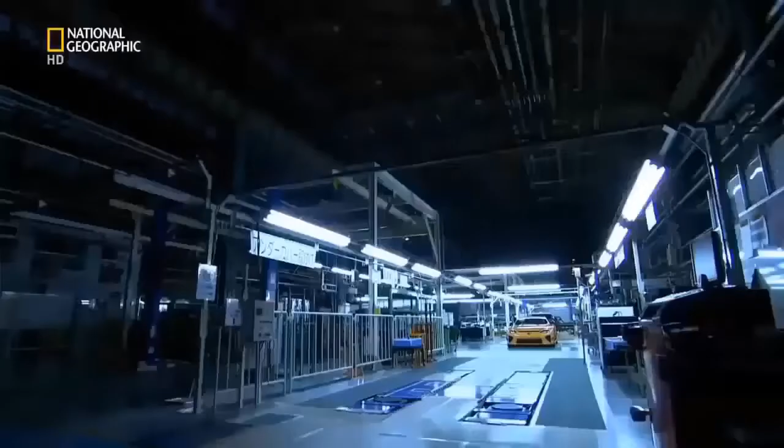Inside this top-secret megafactory, a car like no other is taking shape. Craftsmen hand-build what they consider an automotive work of art. Money is no object. This machine must redefine a billion-dollar brand. Failure, not an option.

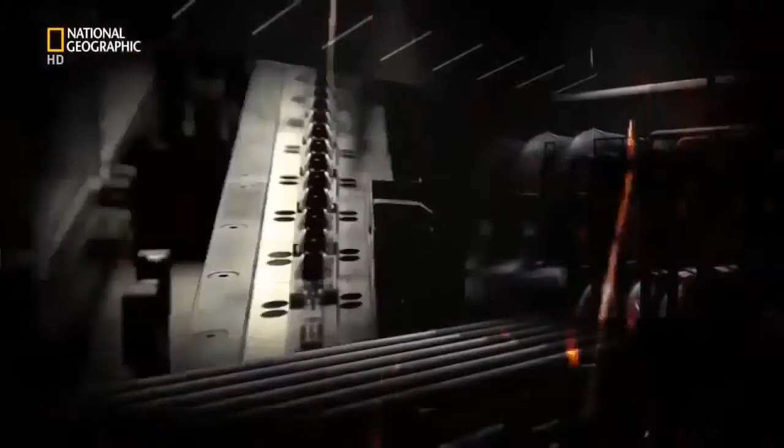Japanese marque Lexus sells itself on luxury, marketing its cars as elegant, quiet, high-tech, and efficient. Now, a different kind of car wears the Lexus badge, the LFA. Aggressive, loud, agile. Highest revving V10 engine in a production car. 325 kilometers per hour. A car like nothing Lexus has ever produced before.

Lexus is just over 20 years old. The world's largest car maker, Toyota, created the brand to compete with other high-flying luxury marques, Mercedes-Benz, BMW, and Jaguar. It's worked. Lexus is now one of the biggest-selling high-end marques in the United States. But now, Lexus is out to inject more excitement into their brand.

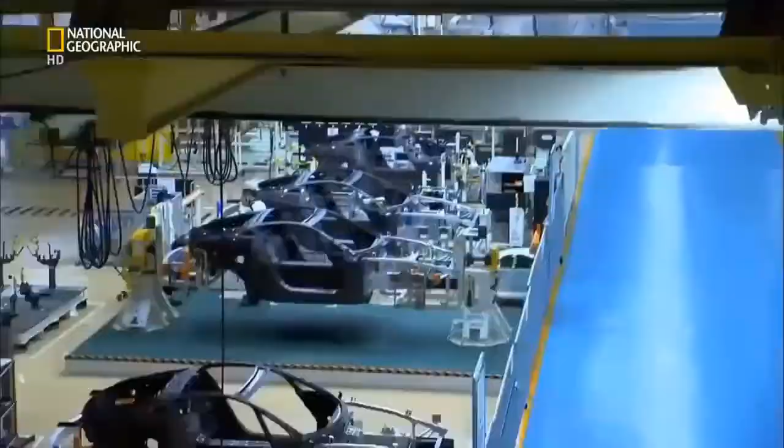I wanted to make a new sports car, one that could stand against the long-established European so-called supercars, Porsche, Ferrari, and Lamborghini, to show that we Japanese could make something like that. It's a risk. The company haven't made anything like this before. Their reputation depends on its success.

Chief Engineer Tanahashi is stepping into the unknown. He must build a car, a team, and a factory from scratch. Basically, we proceeded at my discretion. And where there weren't any rails, I laid them down.

Finding a factory in Japan isn't hard when you're part of the country's largest company. Toyota is so big, they even have their own city, Toyota City. Of the company's 15 Japanese factories, 10 are found in the city or close by. Among them, the Motomachi assembly plant. The company transformed two unassuming blocks of this megafactory to create the LFA. They then scoured Toyota's 50,000 Japanese workforce to handpick just 175.

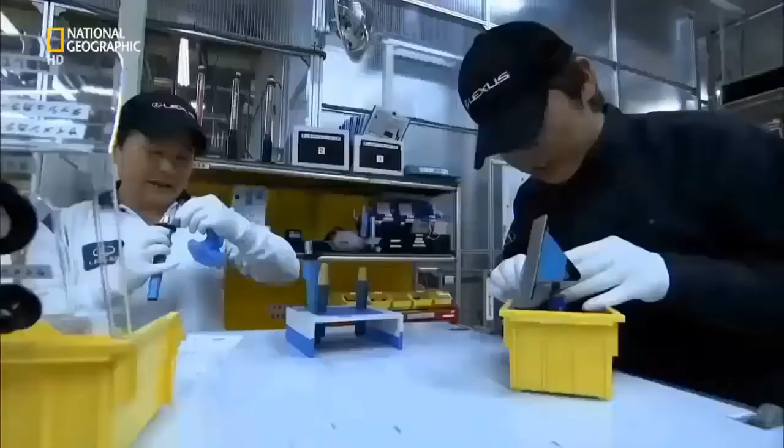All the associates here at the LFA Works feel they are artisans, not just operators. These artisans are known as takumi, Japanese for craftsmen, a status only conferred on the most highly trained, skilled workers. Each and every associate at the LFA Works is seeking to achieve perfection, taking this challenge on with a sort of samurai spirit.

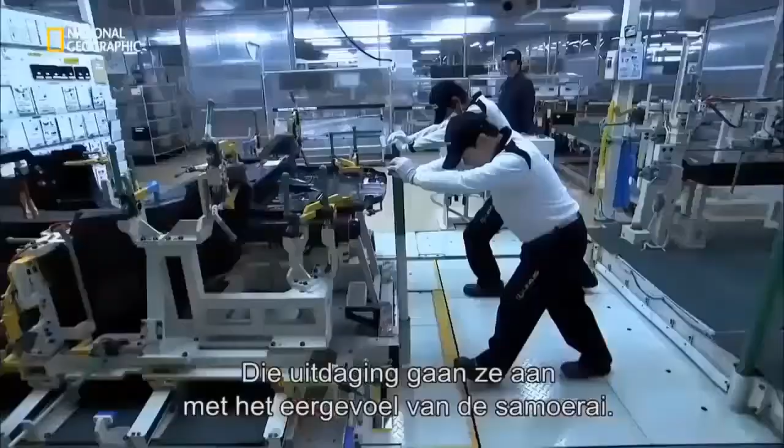Yamanaka Shigeru is manager of the LFA Works. His teamwork credentials come from another time-honored Japanese tradition: baseball. Before this, I was working as manager of the Toyota Motor Corporation baseball team, which brought people together from lots of different... It was because I could manage that organization that I was made manager here.

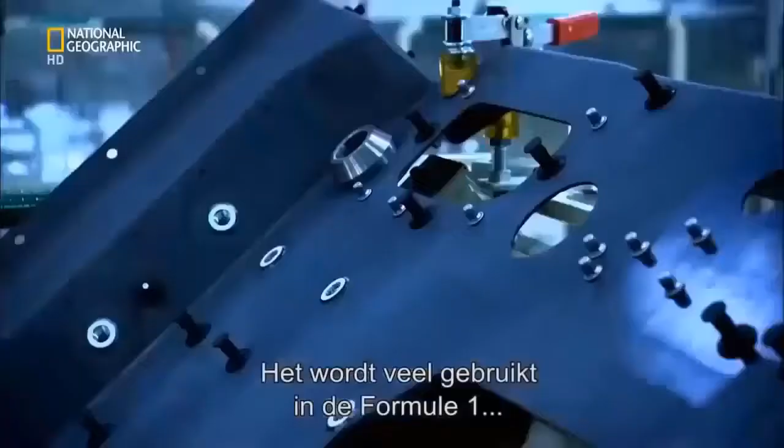To reach their goal, they utilize sophisticated tools and materials to build the car. The most important of these is carbon fiber composite. Carbon is crucial to the car's performance. It's a material 5 times the strength of steel, yet a quarter of the weight. It's the construction material of choice for both Formula One racing cars and the aerospace industry. The company even make their own carbon fiber here on site. Up until now, no television cameras have ever been allowed inside this top-secret facility.

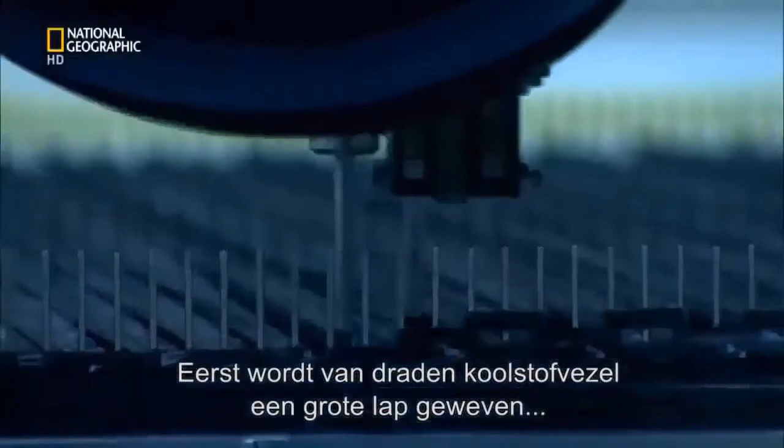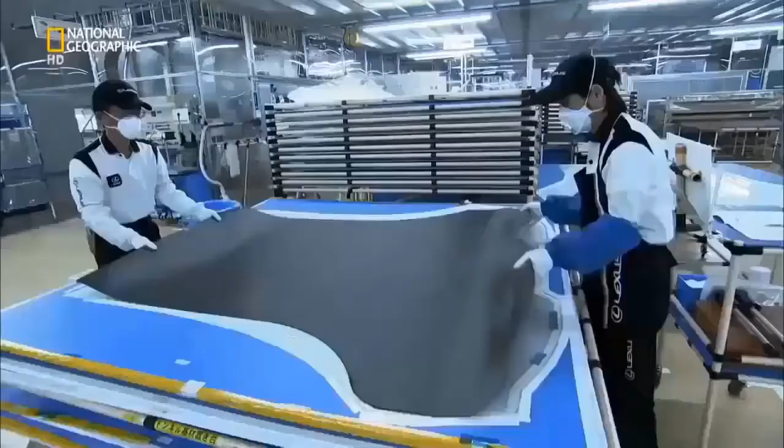First, simple strands of carbon fiber are woven into a pliable cloth using an automated weaving machine. This fabric is then transformed through heat, pressure, epoxy resin, and labor-intensive techniques into the car's core, known as the tub. The tub is pieced together like a 3D jigsaw. It starts with the construction of the floor. To make it, precisely cut carbon fiber cloth is lifted onto a mold.

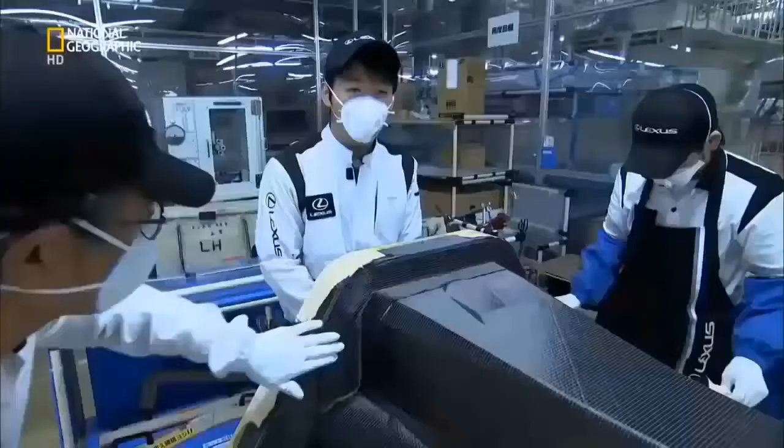Next, skilled takumi smooth the supple fabric over the mold. This one is for the transmission tunnel that will house the drive shaft and exhaust. In very complex areas like this, the fabric inevitably becomes frayed and not very neat. The associates work with these areas as if working with silk, taking great care every day. They also wear masks to avoid breathing in the hazardous fibers. In the beginning, the associates found it very difficult to work this material. It was much easier when they used an iron.

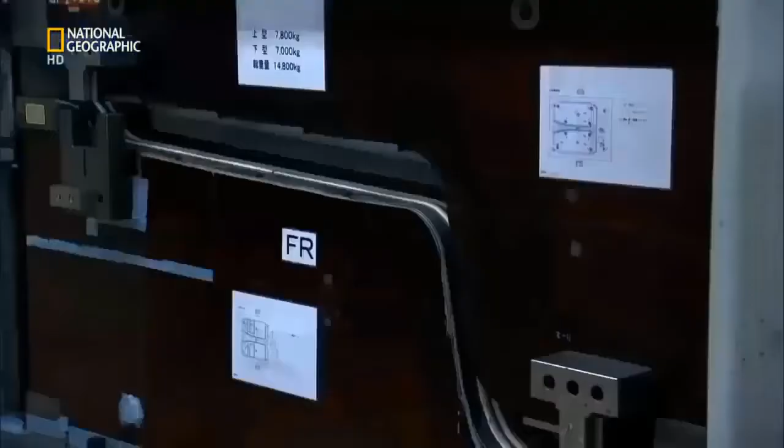The completed part is grill heated to set its shape. It's then fitted into a template, along with 7 other floor parts, and inserted into a 1,000-ton press. A glue-like resin is pumped into the template, and the whole section is then baked for 8 hours at 130 degrees Celsius. Under this pressure and heat, the resin sets hard, binding the individual parts together to produce the car's floor panel.

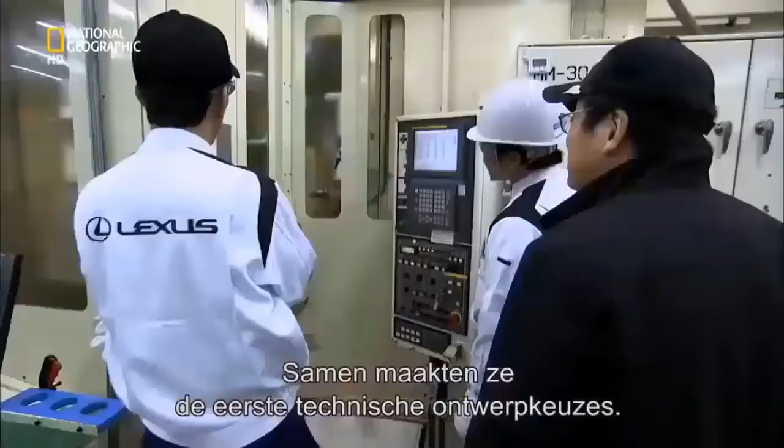Back in 2000, the concept of a world-beating supercar only exists in one man's head. At the company, I talked to just a small group of people at the top, not expecting anything, and they said, go ahead and try. With permission to proceed, Tanahashi gathers a team of engineers around him, and they start to make the basic engineering decisions. In the beginning, we planned to make the body from aluminium.

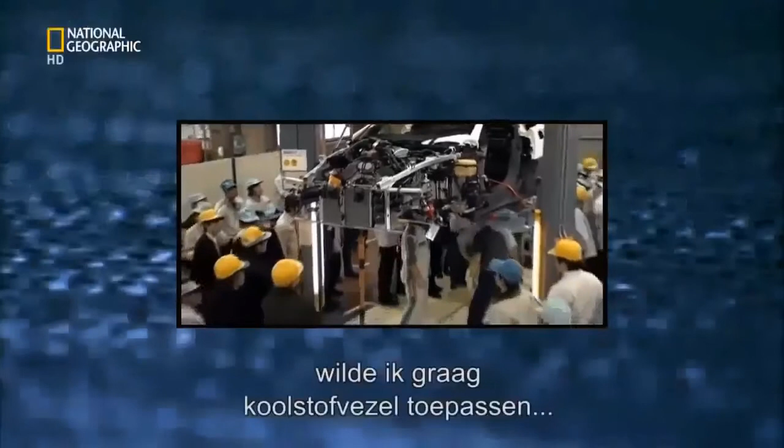But Tanahashi is fascinated with the possibilities offered by carbon. Developing a supercar, a super sports car, carbon fiber was a material I really wanted to try using, if at all possible. But this wonder material has its drawbacks. It's expensive, and the company has never used it to build any of their cars before. Despite these significant challenges, Tanahashi gets his way.

In 2005, my boss said, why not go for carbon? Slapping me on the shoulder. And I made the decision to go for carbon then. It's a bold step. Everyone involved with this project must master a material they have no experience with at all. It was the first time the workers had touched carbon, and everything about it was difficult for the workers.

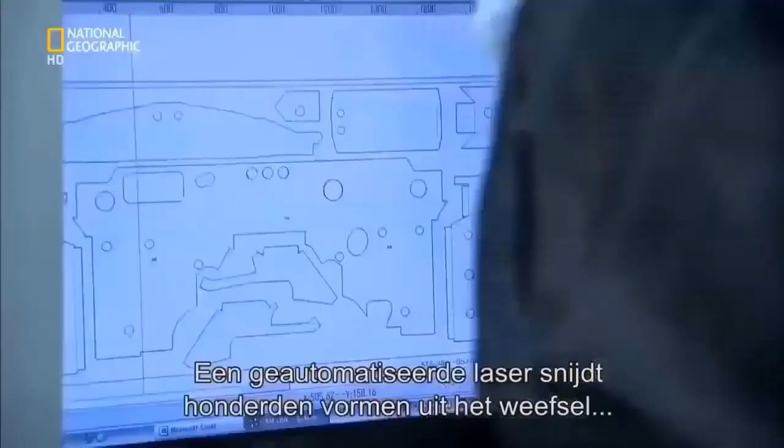In the state-of-the-art carbon fiber facility, the Takumi are returning from lunch. They vacuum themselves down to remove any foreign particles before entering a highly confidential sealed room. Here, the majority of the tub's central frame is created using the most intricate techniques. In this process, an automated laser cuts out hundreds of individual shapes from carbon fiber cloth that's been pre-impregnated with a sticky resin.

Next, Takumi layer the cutouts, up to 20 sheets deep, onto a mold. This one will make the right side panel. The associate uses a dryer to raise the temperature of the laminate and half melts the resin as he applies it. The tacky cutouts stick to each other and any gaps are squeezed out using a vacuum bag that forces them together.

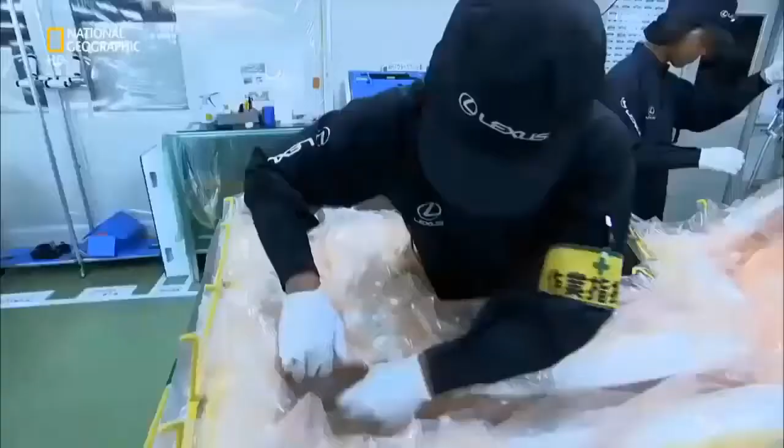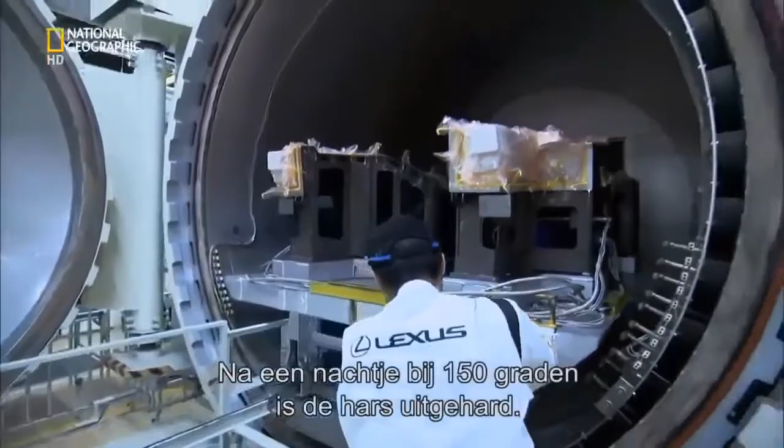The shrink-wrapped side panel is then wheeled across the works and loaded into a pressurized oven. Baking overnight at 150 degrees Celsius sets the resin, resulting in a side panel that's both ultra-strong and ultra-light. An aluminium equivalent would be twice as heavy. Weight saving is the holy grail for all auto engineers. Less weight and more power leads to increased acceleration, and speed defines a supercar.

The body of the LFA is 65% carbon fiber, helping it accelerate from 0 to 100 kilometers per hour in 3.7 seconds. If made of aluminium, it would be 100 kilograms heavier, like having a sumo wrestler in the passenger seat. As it is, this car weighs just 1,400 kilograms all in.

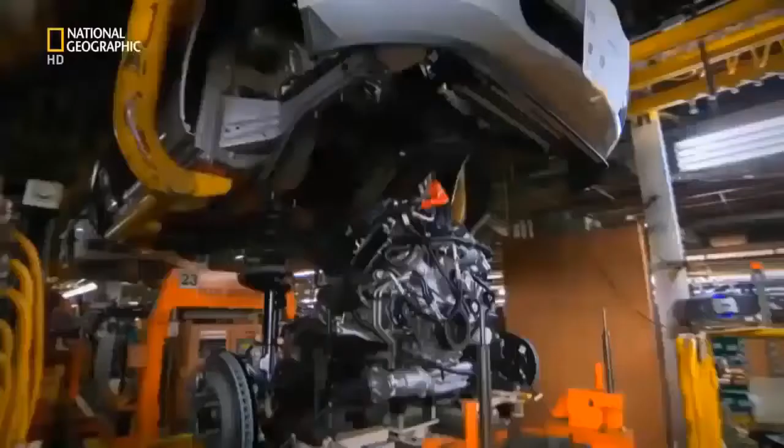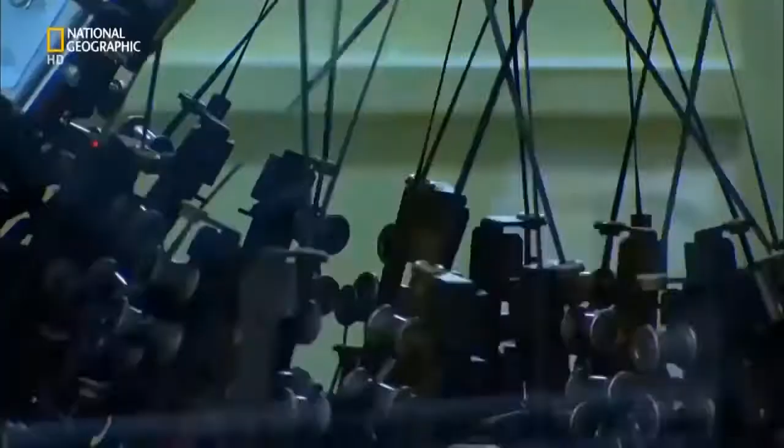Back at the factory, in a locked room, a bespoke machine creates two crucial parts to complete the tub's construction. The roof rails support the windscreen, as well as protecting the driver if the car rolls over. This custom-built circular loom weaves the carbon rail in 3D. It uses lasers to control the feed of carbon fiber strands onto 144 bobbins. These knit the carbon around a top-secret automated template that's fed through the center of the loom. This is done twice over to cross-hatch the carbon weave, so giving the rail its strength.

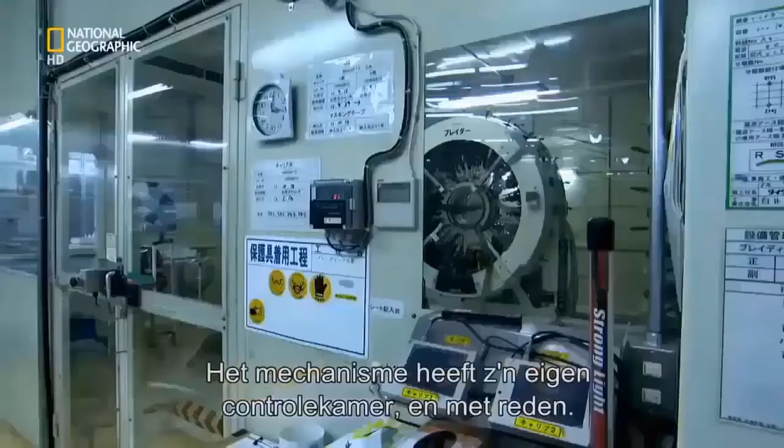The whole mechanism has its own control room, and for good reason. If something goes wrong, even a little thing, the shape gets distorted immediately, so the operator constantly pays attention to avoid this. The roof rail is heated and impregnated with more resin to complete its metamorphosis from a flexible tube to a rock-hard rail. You may think that this is quite heavy, but it is only 2 kilograms.

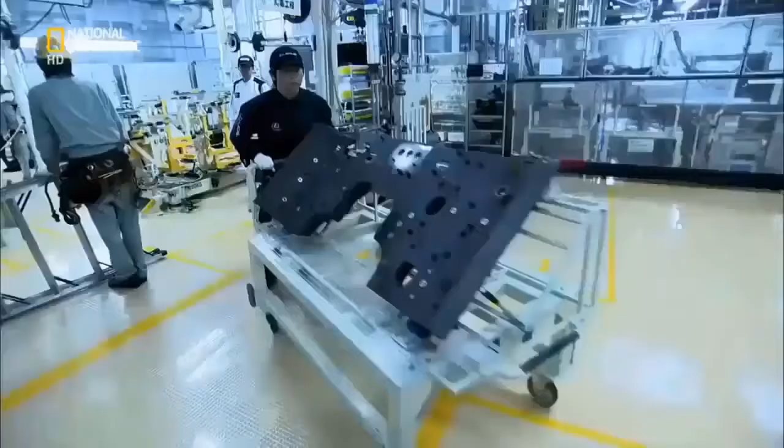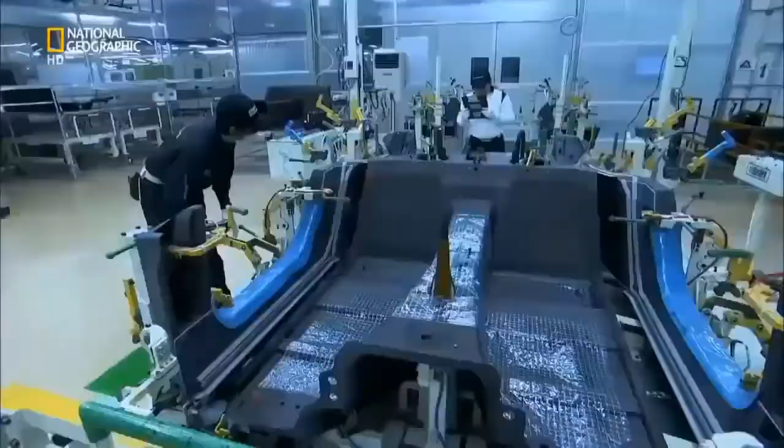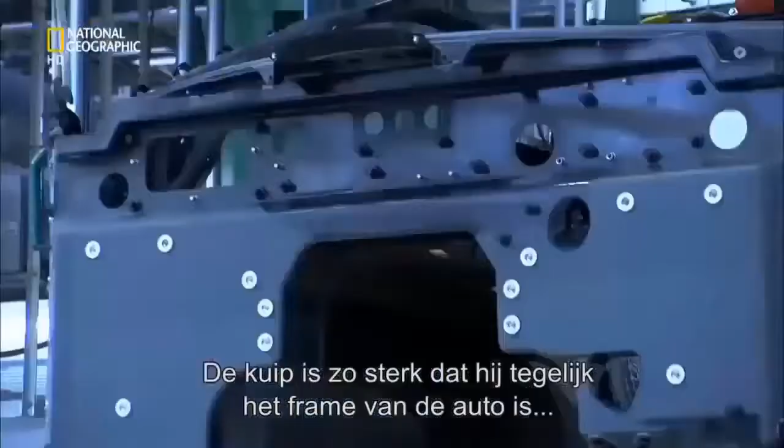The tub is bonded in another top-secret jig. First, a super-strong adhesive, known as epoxy resin, is applied by robot and hand to each of the parts. The separate parts are transferred to the jig and locked in place. Pop rivets keep the pieces aligned. To cure the epoxy, the jig is pushed into an oven and then baked for 60 minutes at 60 degrees Celsius. The resulting tub is so strong, it acts as both the structural core of the car and as a crush-resistant safety cell should the car crash.

The challenge now is for Matsumoto Kengo, chief designer of the LFA, to create a car with a body as technical as it is elegant. For us, aerodynamics, heat and airflow management should be tangible in the design. A conventional car cools its engine with forward-mounted radiators that suck cold air through a front grille. Not the LFA.

Front space is at a premium, so coolant is pumped from the hot engine to twin radiators mounted behind the car's rear wheels. Matsumoto had to shape the car to funnel cold air to these vital components. Airflow management is optimally controlled by setting the angle between the door mirror and the cabin. It goes past the cabin and smoothly into the air intake for the rear radiator.

This shape is not just for styling. The intake is deliberately formed here, from the base of the glass. The result is an airflow system capable of cooling the engine even under the most extreme race conditions.

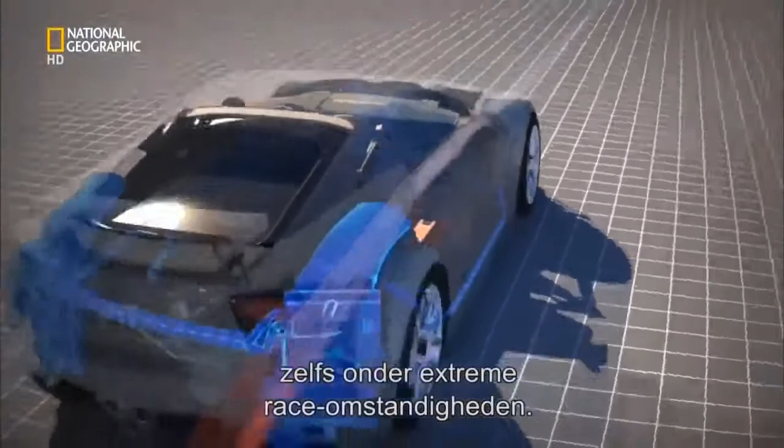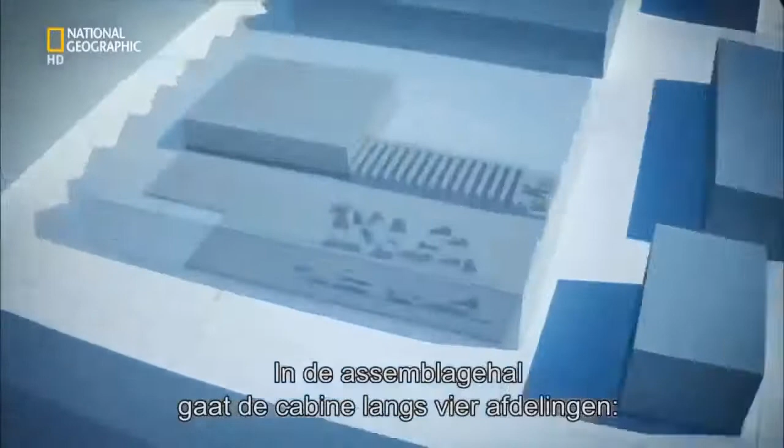It's 8:45 in the morning at the LFA works. The Takumi are warming up for an 8-hour shift ahead. Their first task is to greet the bare cabin as it arrives from its 15-day build in carbon round the corner. In assembly, the cabin will progress through 4 positions: trim, chassis, final, and alignment. 15,000 parts go into making an LFA. The first of these are attached here in trim.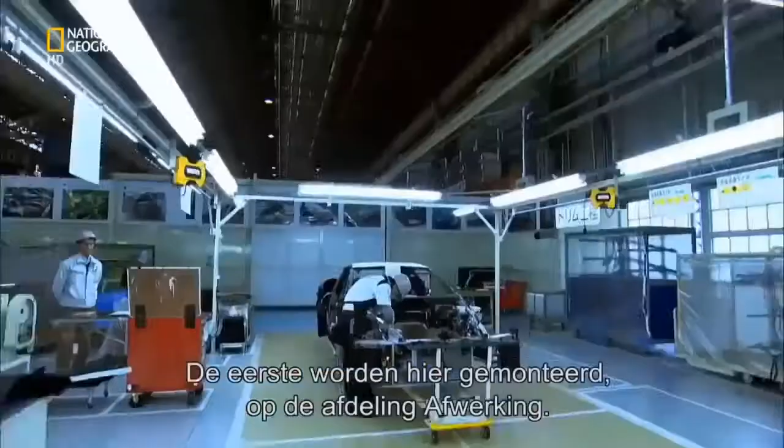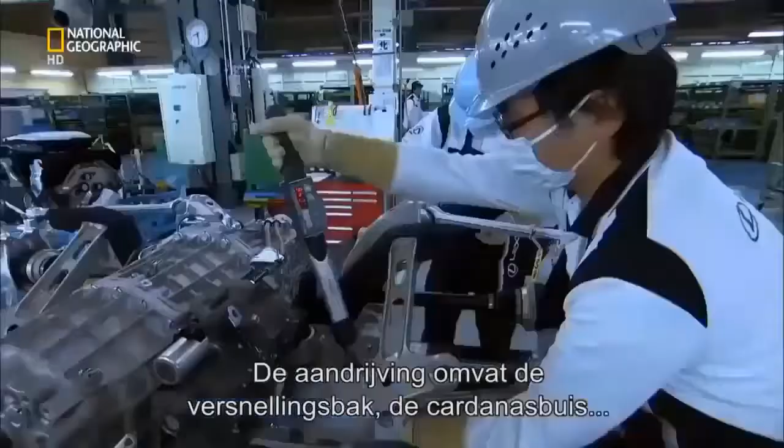Just meters away, other Takumi assemble the drivetrain and suspension. The drivetrain comprises the transmission, torque tube, and last but not least, a 4.8-litre V10. The location of this engine is crucial to the car's entire concept. I wanted to build the car around the people in it. And for a supercar that puts people first, the optimum place for the engine is front mid.

This front mid location puts the engine between the driver and the car's front wheels. With the transmission placed at the rear, the driver is in the center and the car feels balanced to drive. The aim is to make the car's handling as good as possible. But a front mid configuration dramatically restricts the space available for the engine. Tanahashi has a problem.

You need an engine of a certain size with a certain degree of compactness, but you want a high-powered engine as well. Tanahashi needs a small engine to fit in the restricted engine space, but he also needs the power of a large engine because power equals speed. And that isn't all. The high-pitched sound of Formula One makes you shiver, doesn't it? I really wanted to have that as part of the LFA.

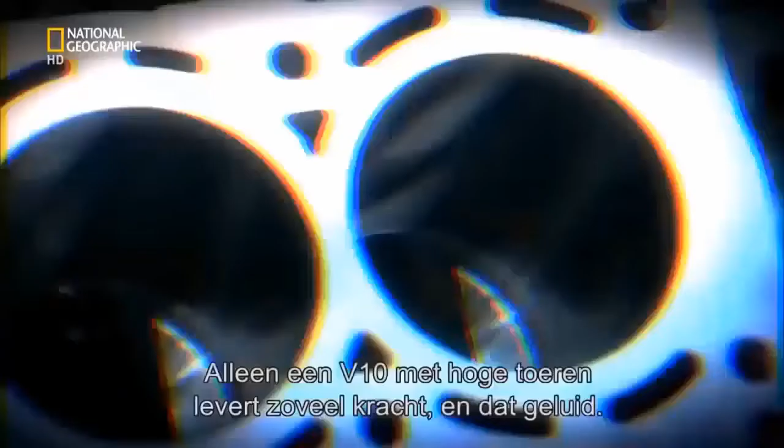Only a high-revving V10 engine supplies this combination of power and sound, but a traditional V10 is too big for his mid-front configuration. Lexus have made nothing like this before. Their production line cars use 6- and 8-cylinder engines engineered for a super quiet ride. This V10 will be the opposite. Tanahashi turns to some old friends for help.

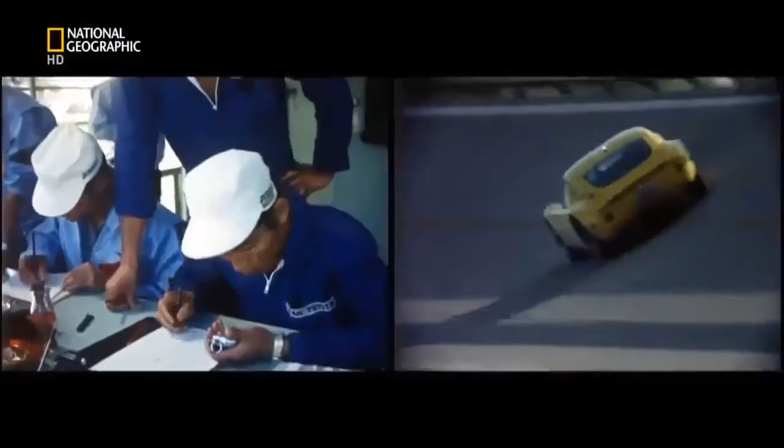We are a motorcycle manufacturer. We understand power alone is not enough in a vehicle. For a sports car, small and lightweight is critical. For almost half a century, Yamaha have worked with Toyota to create high-powered lightweight engines and cars. The legendary 2000 GT, star of the James Bond film You Only Live Twice, and Japan's first true sports car, was the first fruit of their collaboration.

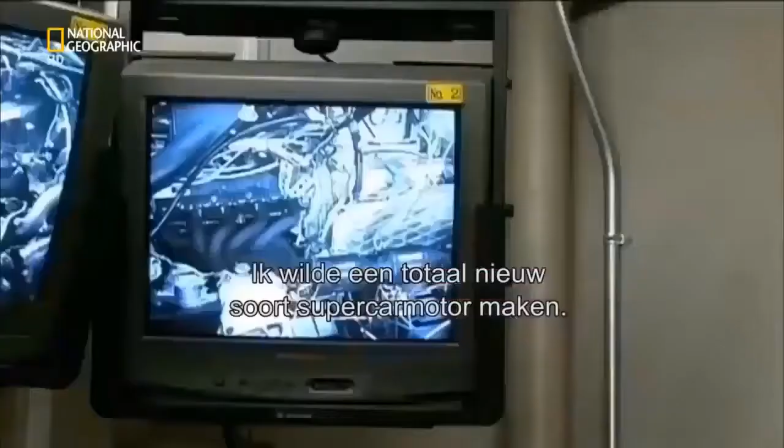Headed by Lexus engine guru Okamoto Takamitsu, the team sets itself an ambitious goal: to create a naturally aspirated V10 engine as compact as a traditional Lexus V8, with the weight of a V6. I wanted to create something different to any other supercar engine. Normally, engineers use turbochargers to boost the output of smaller engines to simulate V10 power. But turbocharged engines don't have the rapid response, acceleration or sound of a naturally aspirated V10.

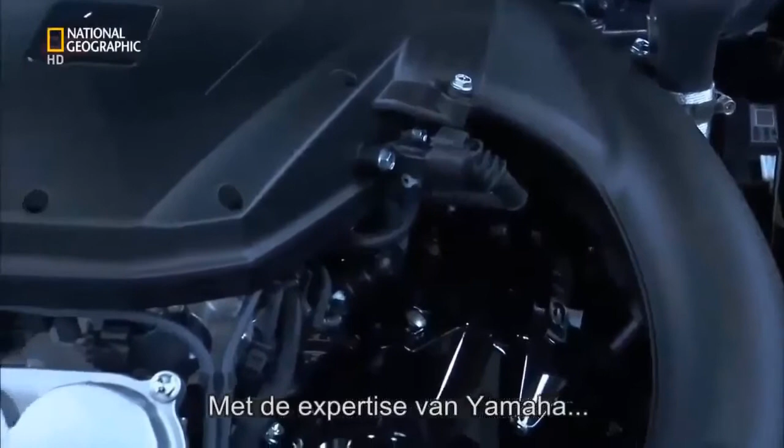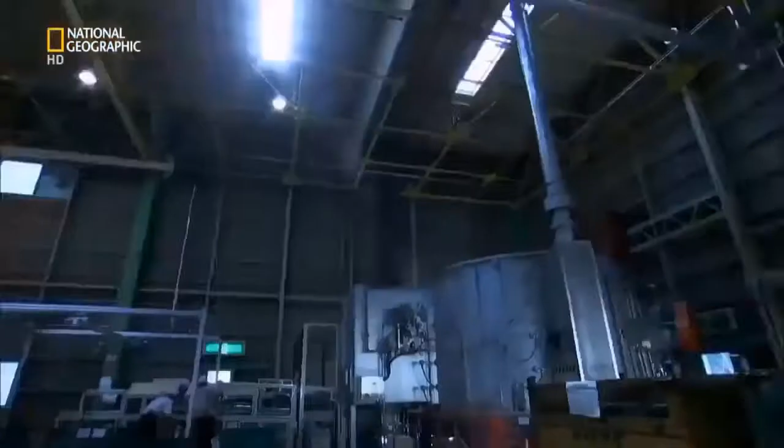By using Yamaha's motorcycle know-how, the lightest metals, and redesigning the engine's guts, Okamoto creates a masterpiece of engineering. A non-turbocharged compact V10 that fits into a mid-front design while keeping weight to a minimum. The engine starts life in Toyota's Miyoshi plant as molten aluminium.

It's cast in a 3D resin-impregnated sand mold made from 37 individual blocks that take a week to fashion. With the blocks fitted together, the mold is ready to be filled. At 750 degrees Celsius, impurities are scooped off the top of the molten aluminium.

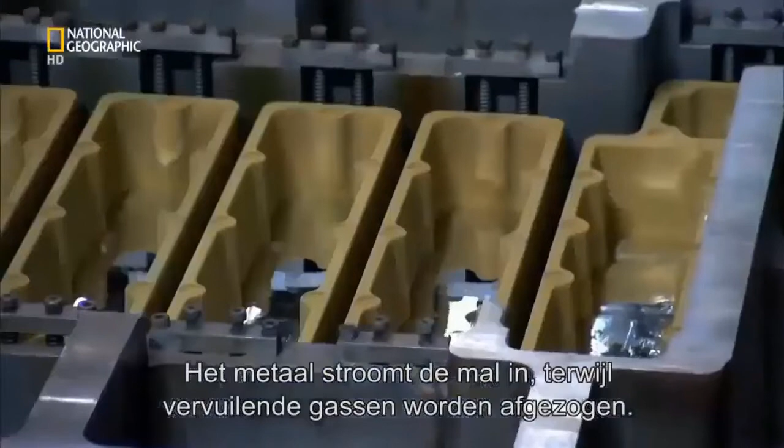The liquid metal flows into the mold as a vacuum sucks out any contaminating gases. Two hours later, with the metal set, the sand is hammered off to reveal the solid aluminium engine block inside.

It's off to Toyota City's Honsha factory and the company's highly confidential Formula One engine facility. These works are always off limits. We're going to go in. Come in. Television cameras have never been allowed in here before.

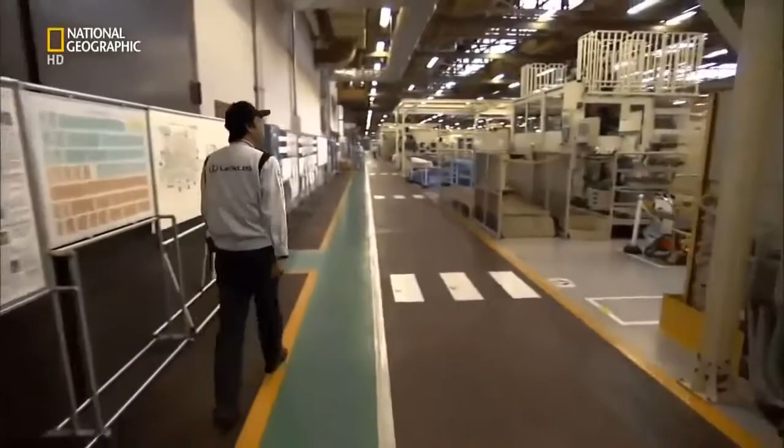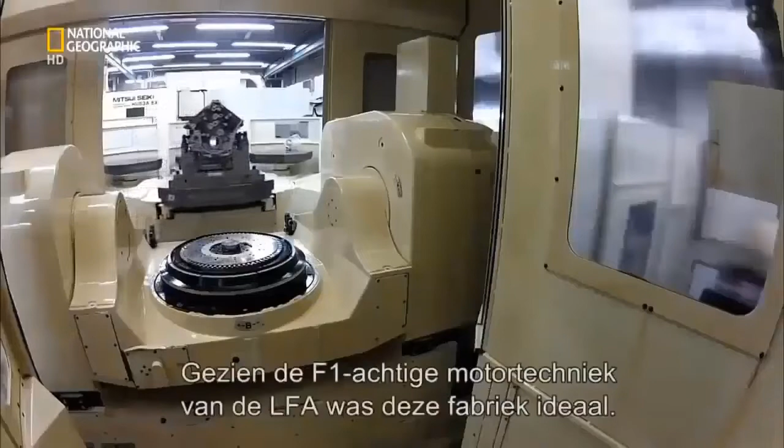For a decade, Toyota spent big competing in Formula One racing. But without a win in 139 races, they withdrew in 2009, leaving this state-of-the-art facility idle. For the LFA team, it was too good an opportunity to miss. The close parallels with F1 engine technology make this milling facility a ready-made fit.

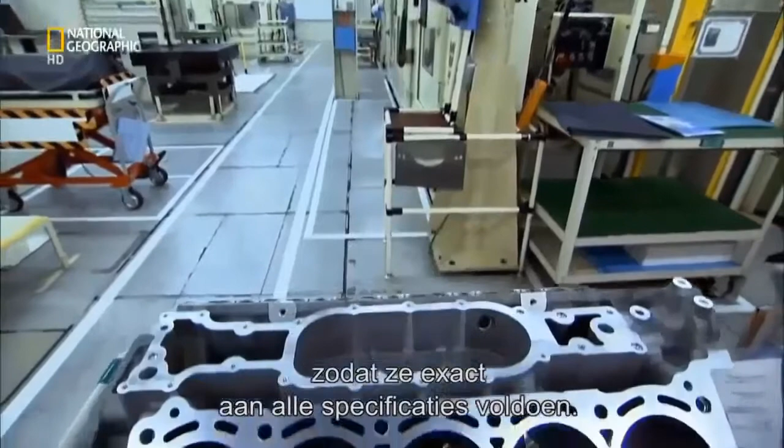In these million-dollar automated machining tools, the rough engine casts are milled, drilled and polished before emerging as precisely spec'd engine blocks. Then the robots hand over to humans. In a sealed room, Takumi hone every sharp edge using precision polishing tools.

Finally, a highly skilled Takumi pre-assembles the finished engine blocks to check they fit precisely. These blocks and heads are paired for life. Disassembled, they travel as a unit to Yamaha's Iwata City plant, 90 kilometers southeast of Toyota City.

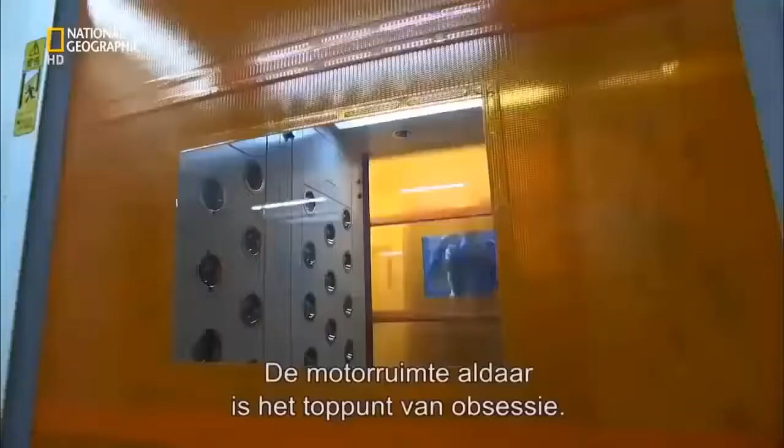The engine room here takes obsession to new heights. As you'd expect, hairnets and airlocks prevent any particle contamination. But the room is also kept at a constant temperature and humidity to ensure that every engine part is at the same state of thermal expansion during assembly. This is more laboratory than workshop.

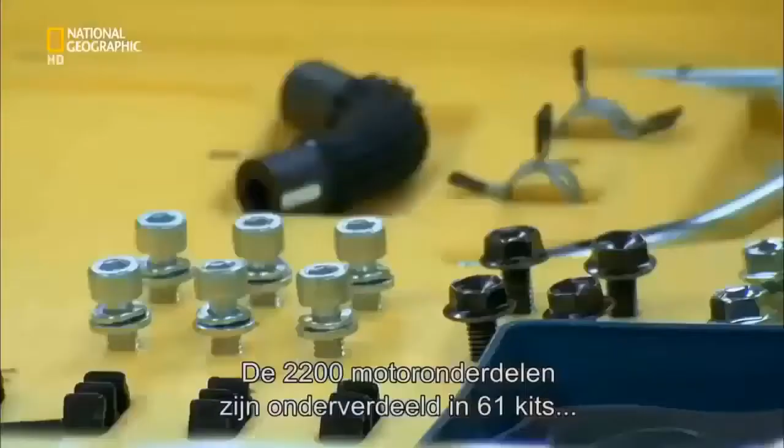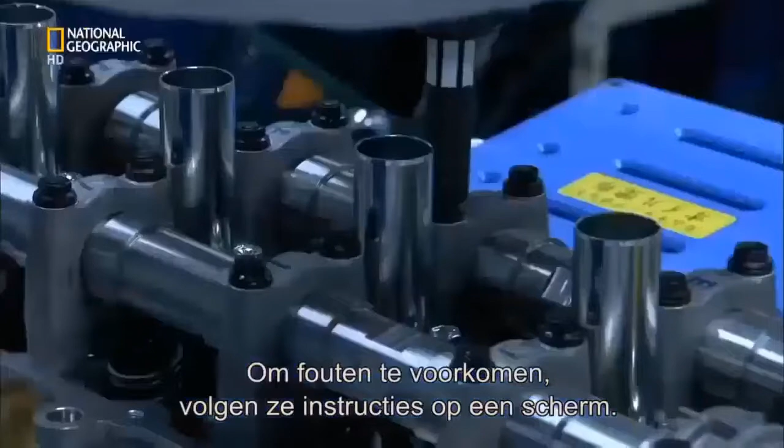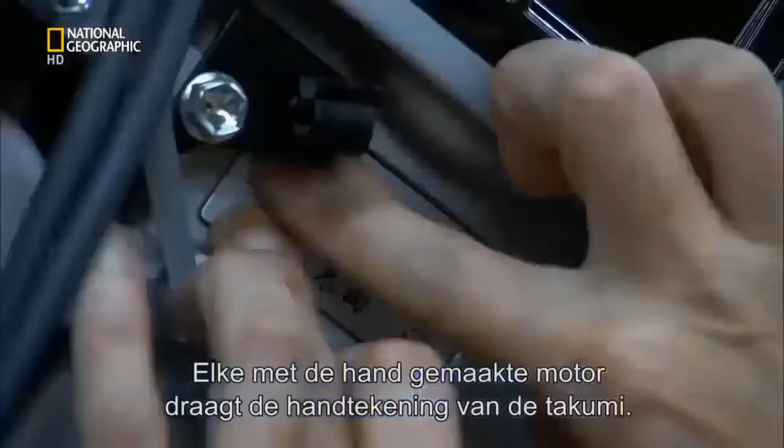The 2,200 engine parts are divided into 61 different kits for assembly by number. 4 highly trained Takumi work here. Each is responsible for a single engine from start to finish. To avoid any mistakes, they follow a series of on-screen instructions. It takes 2.5 days to complete the build of one engine. Each hand-assembled engine bears the Takumi signature.

Before this masterpiece goes anywhere near a car, it undergoes a half-day of exhaustive testing in the room next door to engine assembly. The resulting 4.8-litre engine is so responsive that it takes just 0.6 seconds to reach 9,000 RPM. That means instant acceleration, whatever gear you're in. This engine has excellent response and more RPM than any other commercially available engine. Response time is so fast that a digital rev counter is the only unit able to keep up.

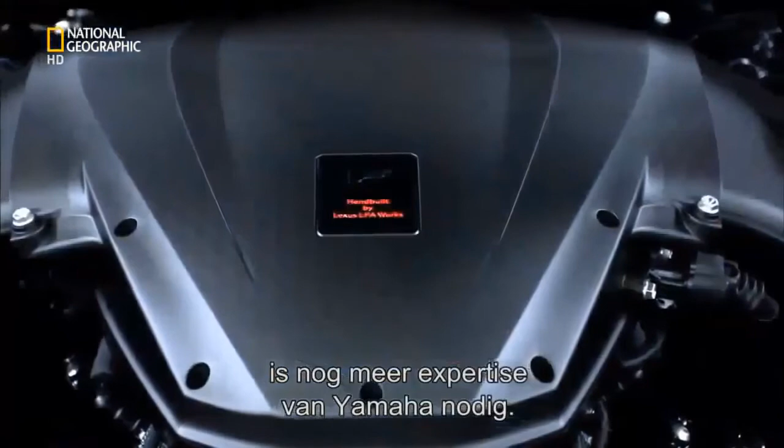And the sound of this high-revving engine is unmistakable. The sound of the LFA is unique, and once heard, never forgotten. To achieve the engine soundtrack that Tanahashi insists upon requires more of Yamaha's specialist knowledge. We are a manufacturer of musical instruments, so when it comes to sound technology, we have a certain level of know-how. Honji Yoshikazu is obsessed with sound.

I think the relationship between a super sports car and its driver is like the relationship between a top musical performer and their instrument. When they play in a certain way, they can listen to that sound and use it to produce another, better sound. Critically, a car has 2 different sound characteristics. One sound is the exhaust. You can call it an iconic sound. Just by hearing that sound, you know which car it is. The other, which we were particularly concerned with, is the sound heard by the driver.

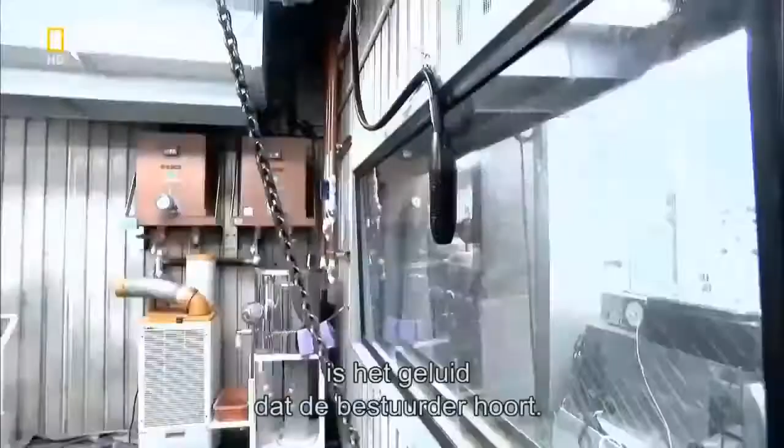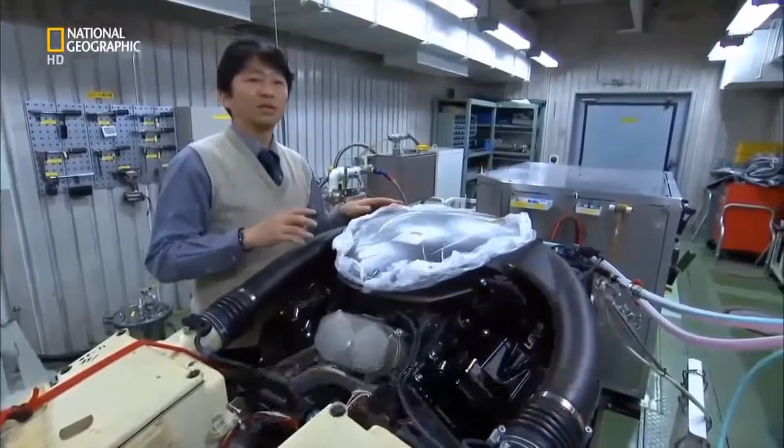To refine the driver's soundtrack, Heiji Maruyama, general manager of Yamaha Motors, had to redesign the component that sits on top of the engine, called the surge tank, by turning convention on its head. The function of the surge tank is to send air equally into all 10 cylinders. Normally, techniques to reduce noise from the intakes are used. We thought to go the other way and use it to amplify the sound, to communicate it to the driver.

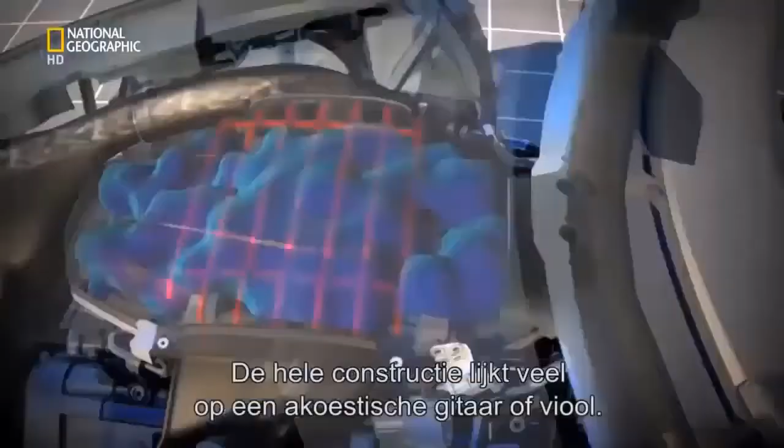Maruyama tunes the chamber by varying the thickness of the surge tank's upper surface and adding internal vibrating ribs. The construction is very like that of an acoustic guitar or violin. The team channeled these good vibrations back into the cabin using sound passages. We use these to send low-pitch sound to the driver's feet and higher frequency sounds through at ear level. The driver is in the middle of this dynamic surround sound system.

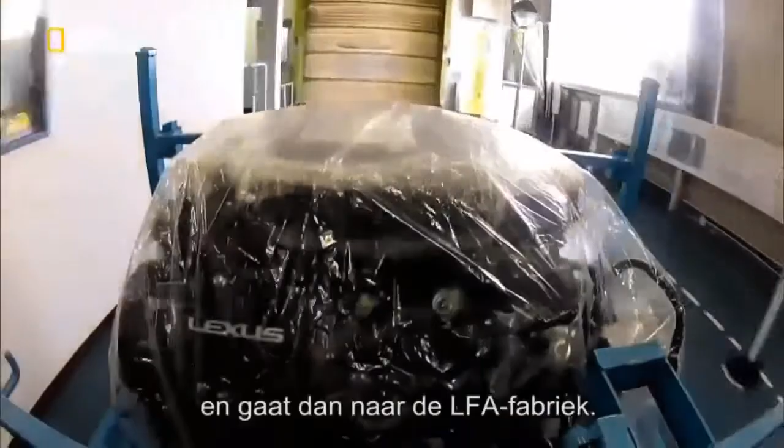The completed engine is forklifted onto a waiting truck for shipment back to the LFA works. Here, as part of the assembled drivetrain, it's inserted into the cabin's belly, guided only by eye.

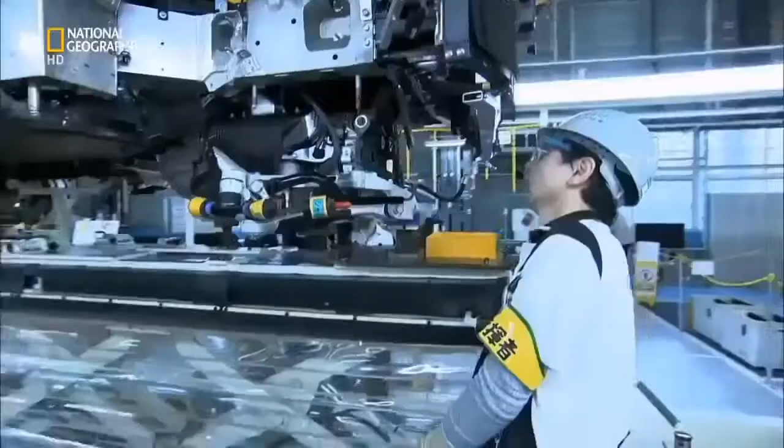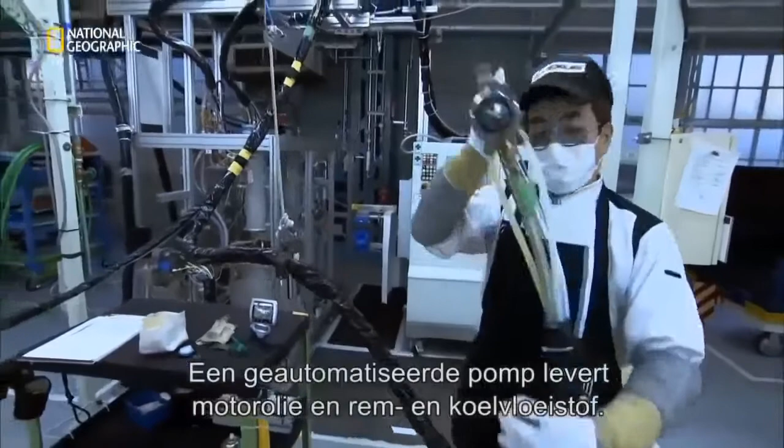With the guts of the car in place, it's time to feed them. An automated pump injects engine oil, brake fluid and coolant into the appropriate under-bonnet opening. In Japan, machines play a tune to alert anybody nearby that they're running. This one plays an American folk song. With the precise volume of fluid added, the pump stops, as does the music.

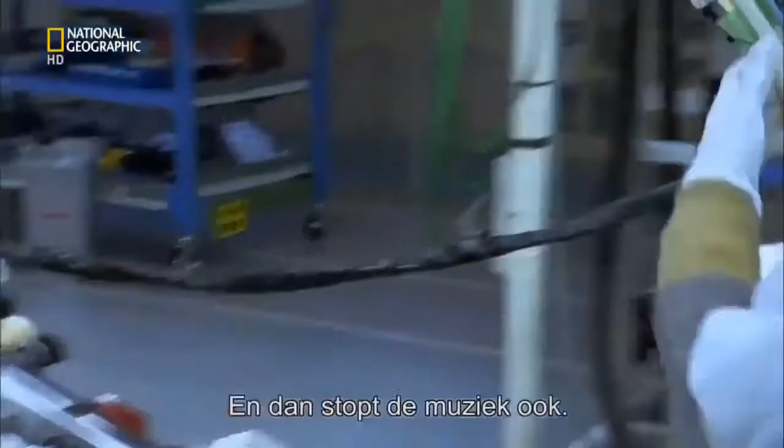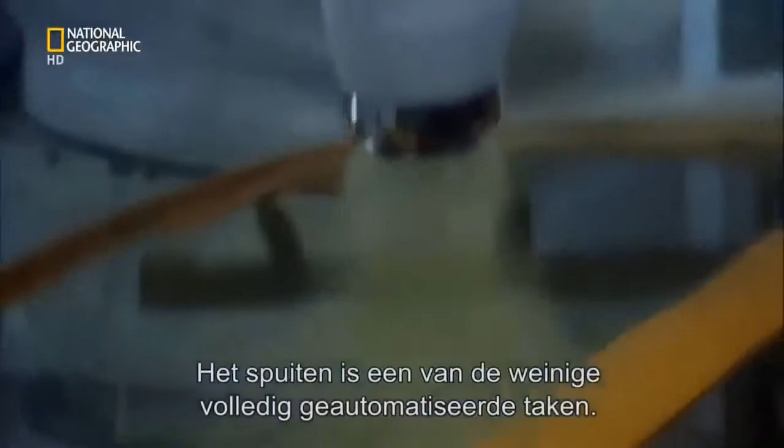The car's 9 moulded glass fibre body panels are manufactured off-site. This material is both strong and light, but far cheaper to replace than carbon fibre, should the car crash. The paint shop is under the same roof as assembly, but it's a very different world in here. At the LFA works, paint is one of the few production processes performed by robot. The company believes they give a more consistent finish.

But there's always an ongoing human battle in the paint department. Dust is the greatest enemy for painting. If dust gets into the paint surface, when it's heated, the dust swells up and causes a blister. So the atmosphere is controlled on a daily basis, and there's a strict dress code. Up to 5 layers of paint are applied. And where robots can't reach, humans can.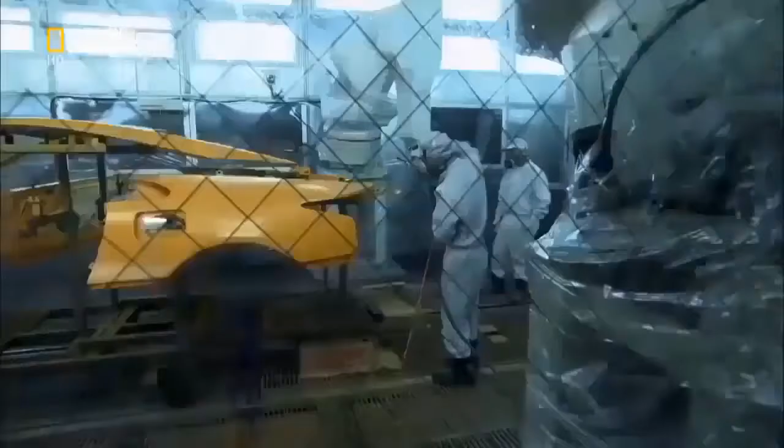Job done. The sprayed panels are dried in an oven at 100 degrees Celsius for 50 minutes before being wheeled out for inspection. The battle against dust continues, with water nozzles spraying a fine mist into the air to stop anything drifting onto the pristine surfaces. A bright light inspector spots any blemishes and marks them up to be polished out.

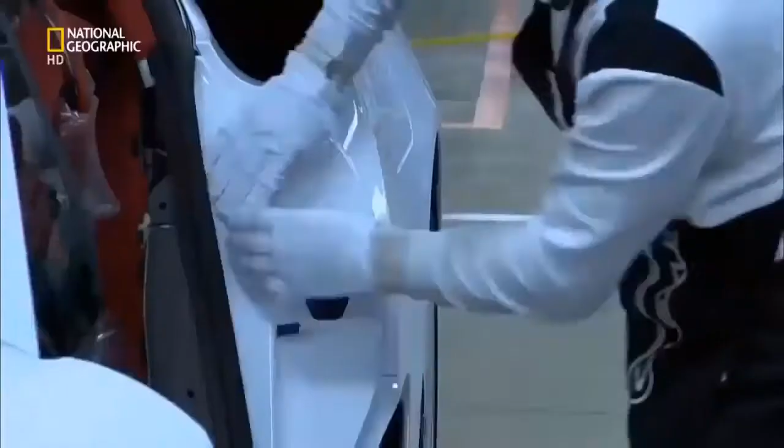The completed panels are wheeled out of paint across the factory floor and attached to the carbon tub back in assembly at the 3rd position on the line, known as final. Here, the hand-stitched leather interior is installed, and the forged aluminium wheels with bespoke Bridgestone tyres are also fitted. It looks as if the associates are performing each task very slowly, but every one of them is working very carefully and with a high degree of certainty. If you compare it to a sport, they are top players who complete a successful play every time.

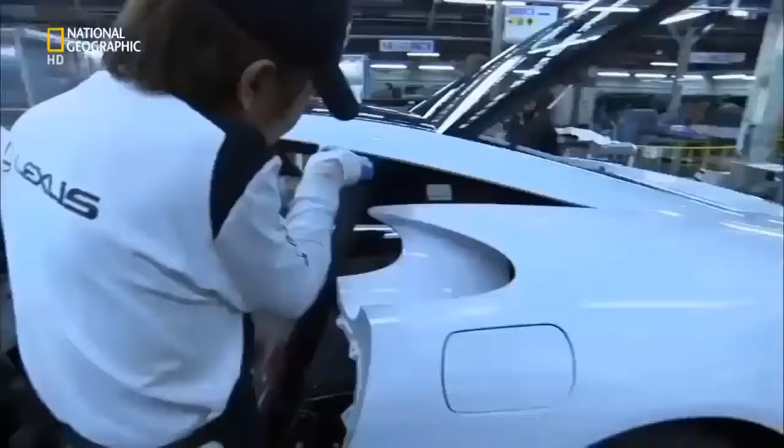The LFA works runs like clockwork, yet there's no clock watching. The reason why there is so much time is that Chief Yamanaka tells us to take our time and work slowly, so that we can make something that we know is good. How can I put it? He says that in order to ensure quality, we can take as much time as we need. That goes for overtime as well. If it means we make something good, then we can do overtime.

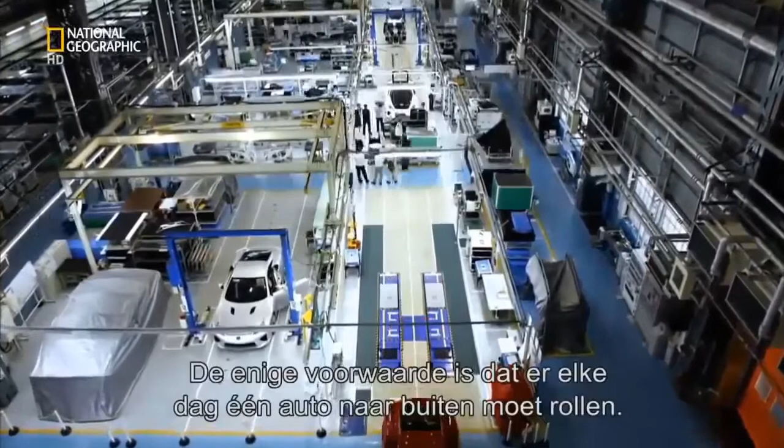The only stipulation is that one car must drive off this assembly line every day. And from the beginning, Chief Engineer Tanahashi was clear that only 500 would be built. At a car a day, that will take just 2 years. And then, this factory will close. Making only 500 cars positions the LFA as a very special car. There is no plan to make any more at all.

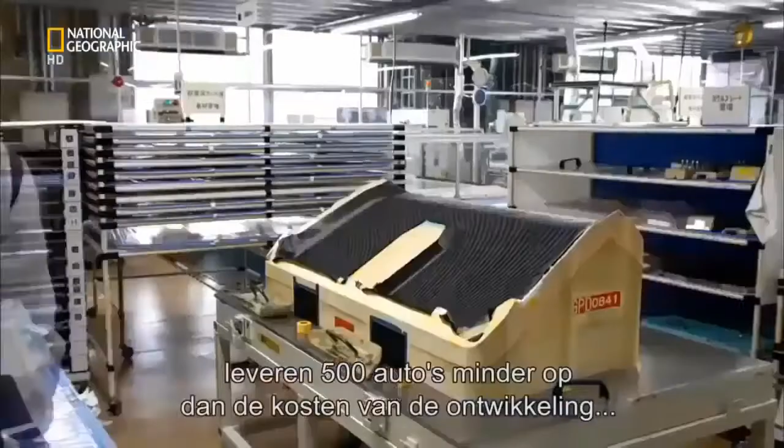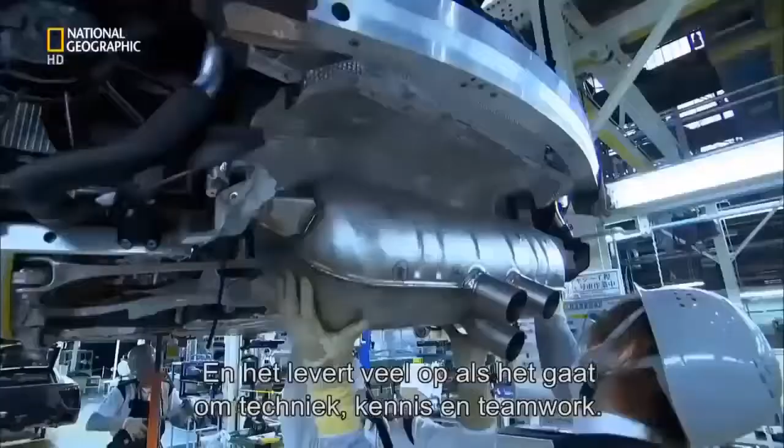Even pricing the LFA at $375,000, the most expensive Japanese road car ever, a limited production run isn't going to recoup the costs of development, the use of cutting-edge materials, and unlimited overtime. I think it will be difficult to make a profit with only 500 units delivered. But by producing the LFA, the Lexus brand gains in value and is well received worldwide. I think the legacy will be left in technique, knowledge and teamwork for making cars that will please our customers in the future.

Back in 2004, with the prototype build, Chief Engineer Tanahashi takes a bold decision. He wants the car proved on the severest of tracks. Nothing in Japan fits the bill. So he takes the entire development team to the notorious Nürburgring in Germany. For us car makers, the Nordschleife on the Nürburgring is like a mecca for cars. This is where this car was honed. The 20-kilometer Nordschleife section of the Nürburgring is infamous as the world's most punishing test track.

For 4 years, the team tests every aspect of the car's engineering around the Nordschleife's dips, jumps, relentless corners, and flat-out straights. The car's development makes progress towards its production deadline, but Tanahashi wants to fast-track its fine-tuning. In 2008, he throws it into the unforgiving world of racing and enters the Nürburgring 24-hour race. It was purely to get more feedback on the production type LFA and to improve it under real race conditions.

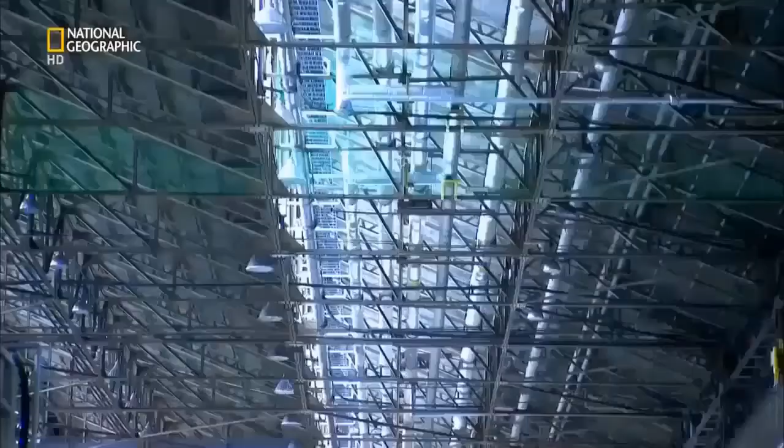The brutal experiment works. A year later, the revised car wins its class. Tanahashi is finally happy, and in 2010, the LFA goes into full production. And when in 2011, a special race edition of the standard LFA is launched, its name pays homage to the racetrack that forged it. It is with thanks to that sacred place that we called it the Nürburgring package.

This Nürburgring package has a retuned engine which pumps out 571 horsepower, 11 more than the standard engine. This extra power requires more downforce to keep the car on the track, so the rear spoiler is larger and fixed. And left and right canard fins on the car's front bumper also increase downforce. The stiffer lower suspension makes it more suitable for a life on the track.

Finally, to increase acceleration, the computerized transmission is upgraded to change a split-second faster. It all adds up to a Japanese supercar. Only 50 will be built, each with a price tag $70,000 more than a standard LFA. Back at the LFA works, in assembly's last position, the wheels are aligned to ensure the car handles perfectly. After 3 days in assembly, the car officially moves to inspection.

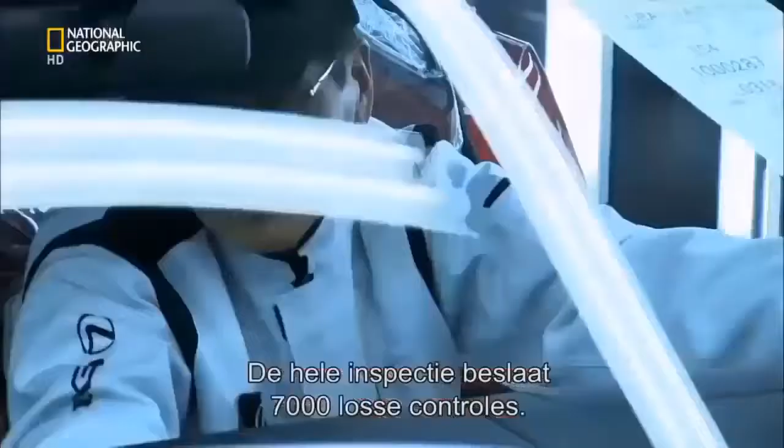The inspection process involves 7,000 separate checks. Hayashi Katsumi does the first of 1,482 of these under lights. Right now, I'm inspecting the paint surface. I'm using my hands to feel for any uneven areas in the bodywork. You have to touch it gently, like I'd touch a woman. I've been doing this job for 30 years. If I didn't have my wife, then it would certainly be my lover.

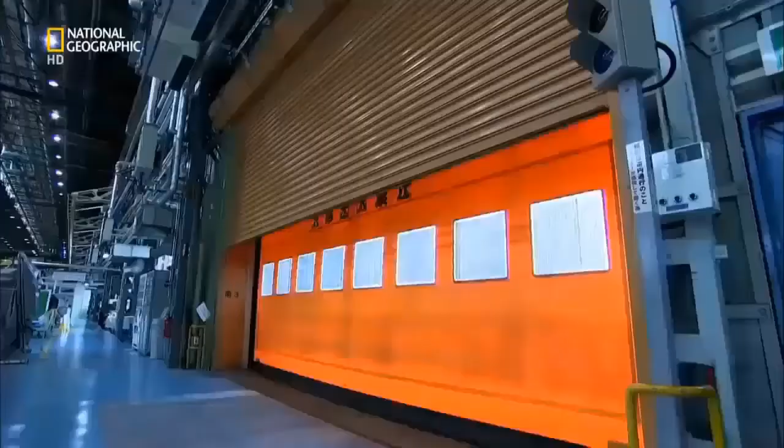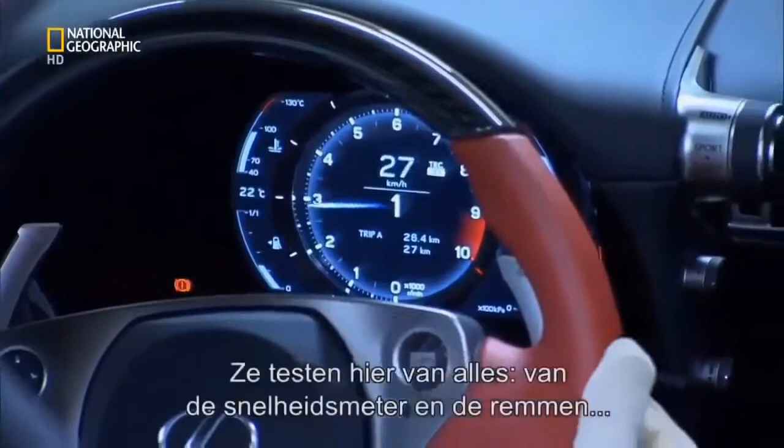With the internal and external surface inspection signed off, the car leaves the LFA works for good. It's driven through the Motomachi plant into quality control. This will be its home for the next 7 days. The checks performed here range from speedometer and brake tests to water tightness. The reports fill a 350-page booklet.

Finally, test driver Amano Nobuaki ensures each of these cars is road ready when it leaves the factory. The car is bedded in on Motomachi's very own test track. The masked sections of the bodywork are to protect vulnerable areas from stone chips. I think this is the best possible job in the world. Amano checks the car's controllability, engine sound, power, braking performance, and vibration noise on the 1 kilometer track.

There is one danger driving this car every day. Every now and again, I just want to forget the job and drive this car away somewhere to have for myself. This car is complete and ready for its owner. To date, all 500 LFAs are spoken for. No more will be sold. The Lexus brand is safe, but Tanahashi still has something more to prove.

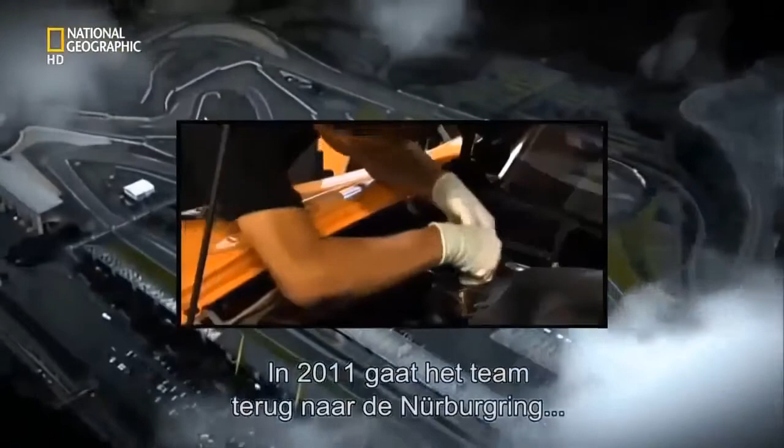In 2011, the team reassemble at the Nürburgring to put the car into the record books. They're out to beat the fastest official time by a road-registered production vehicle. This is the chance for the Nürburgring package to prove its pedigree. With test driver Iida Akira behind the wheel, the team held their breath. I pushed the car on every corner. There are over 150 corners, driving very aggressively, but at the same time, I enjoyed it. To beat the record, Iida must average 167 kilometers per hour over the track's 20 kilometers.

I had no concept of the time when I crossed the finish line. Seven minutes, 14 seconds. The fastest official time by a production car not using slick race tires. And the 5th fastest time ever. It was an unbelievable moment. It's one of the best moments of my life. There are a lot of sports cars, but this one gives the driver a really direct experience of driving. This is a very emotive car, a driver's car.